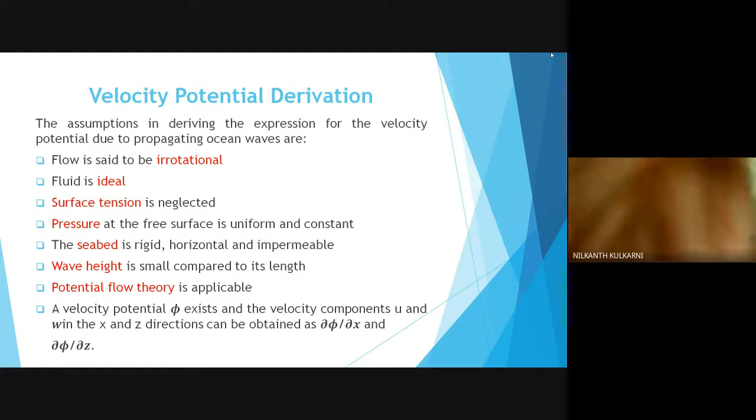Nitin, hello Nitin, you are from which place? I'm from Latur sir, I'm a student of SGGS in the past.

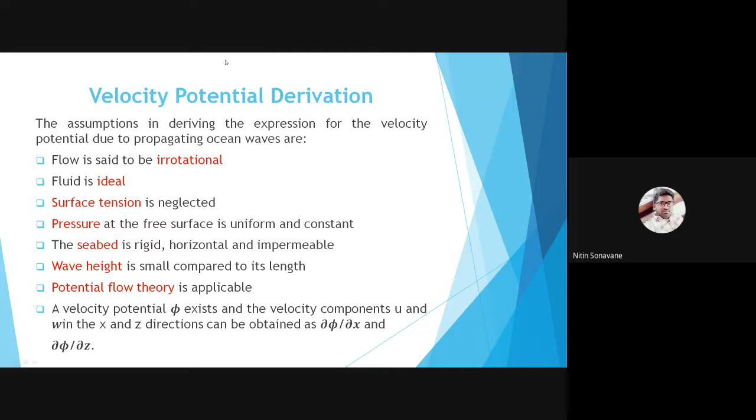Very good, very good. Now, anyone else who is a faculty member from state engineering colleges, can you interact? Friends, hello. Yes sir, Dawde sir. How are you Dawde? Fine sir. Okay, I have said fine, so you must be fine.

Now we are talking about, it's a highly mathematical fluid mechanics course in which we are studying wave mechanics. So for wave mechanics, as I have summarized, I will take you to this sketch very quickly, then you will understand.

Could you see this diagram of a wave? Yes sir. What are the 2 parts of this particular wave? We will go very slowly and very systematically. One is a crest. Just I am showing by a pen. So this part is a crest, the topmost part.

Is my pen visible on the sketch, Dawde? Yes sir, white pointer. So this is crest. So what is the value of theta at the crest, Dawde? Pi by 2. Pi by 2, 90 degree, okay?

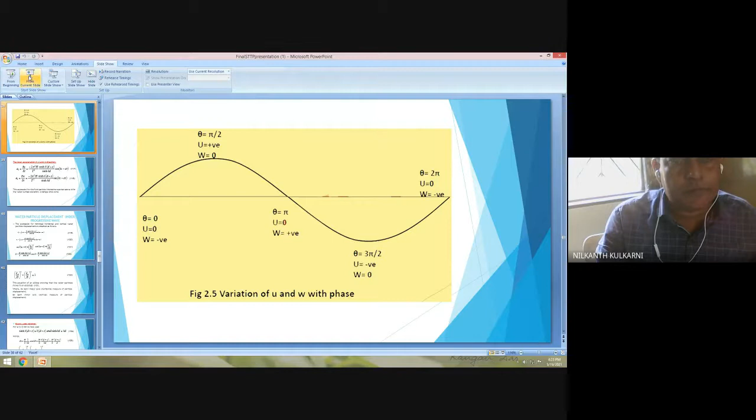Yes sir. So have you taken the definitions of K and sigma now? sigma is 2 pi by capital T, and K is 2 pi upon capital L, where capital T is wave period and capital L is wavelength.

What is wavelength in this case? Wavelength is this, from 0 to 2 pi, the total length of this x-axis. This is total wavelength, first we will give some time to understand this. Total wavelength is this much, 0 to 2 pi.

So what is the value of sigma? Is it greater than 1 or less than 1? Any participant? Hello? Is it greater than 1 or less than 1, Nitin? Hello? What is the value of sigma?

Write down, sigma is less than 1. It is a fraction. K is also less than 1, it is also a fraction.

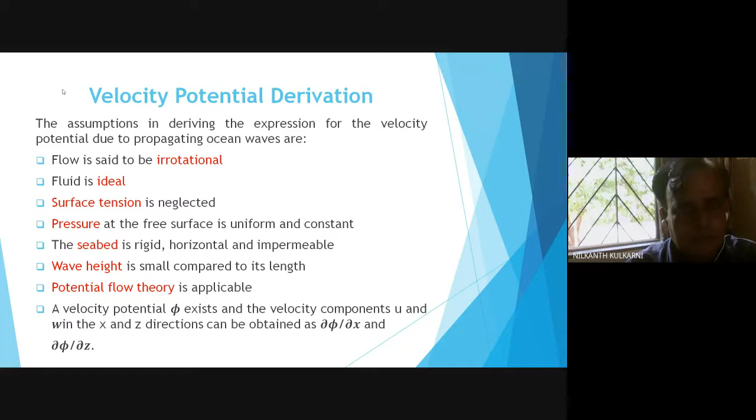Now we will go to that slide and explain the velocity potential derivation. Assumptions we have seen already, and after that the coupled continuity and Bernoulli's equation is also given in 43-44.

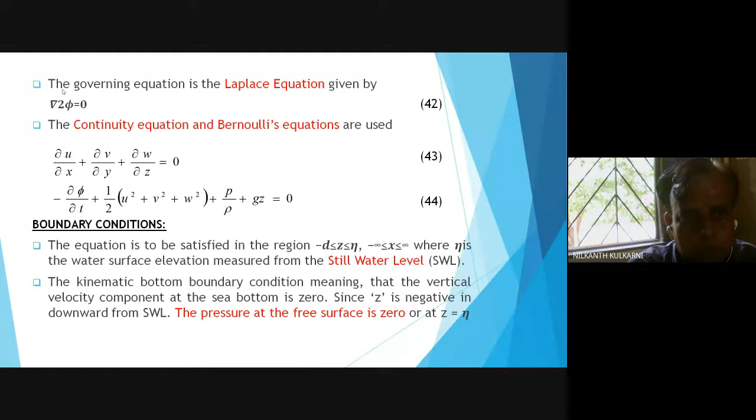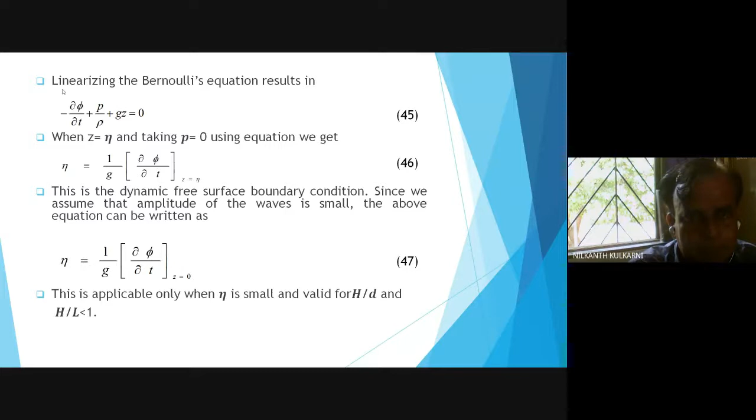To solve this coupled equation, we have applied two boundary conditions. First boundary condition is at Z equal to wave surface. The value of eta is given as 1 upon g into d phi upon dt, that is the value of eta, and we solve the equation.

Laplace equation by method of separable variables. I will not go into detail of this mathematical technique much, but you should understand the steps followed.

Independent variables are x, z and t. Then we find out the constants C, D and A, B. The constants are determined by applying the two boundary conditions.

First boundary condition: the gradient of velocity potential in the z direction is 0 at z equal to minus d.

Nitin, can you tell me the meaning of this equation 62? Hello, Nitin? Yes sir, equation 62, could you see it? What is that equation? Dou phi by dou z is equal to 0 at z is equal to minus d.

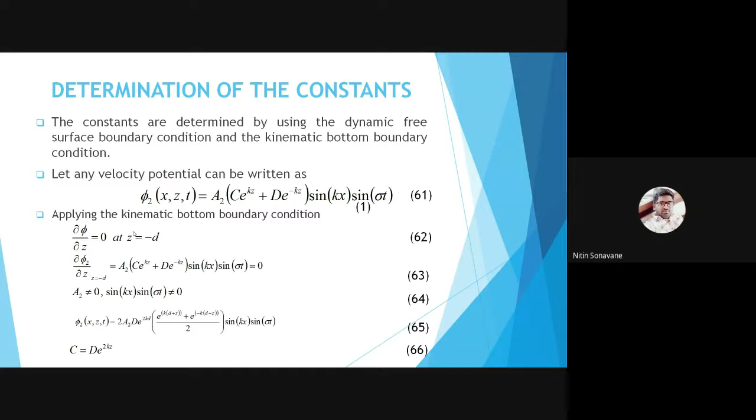What is the physical meaning of this equation? Can you briefly tell me? The velocity potential along z. What is minus d here?

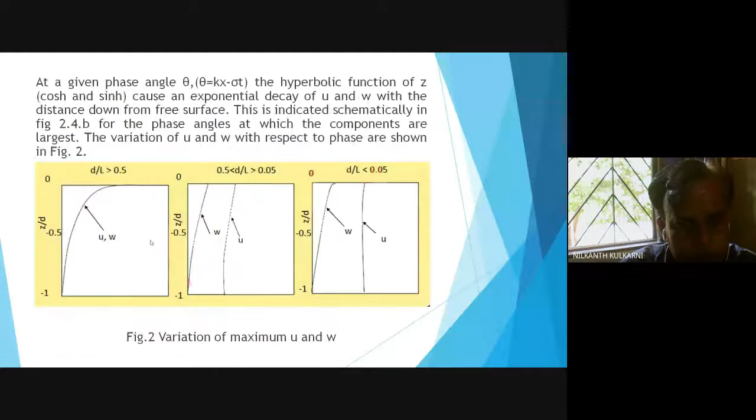Minus d means what? When you go to this particular sketch, I will show you minus d. So minus d means the depth, the z coordinate below the static water level, z minus 1 meter, z minus 2 meter, and so on. Could you see this sketch? This is a wave, below this wave is the depth of ocean water below the datum surface.

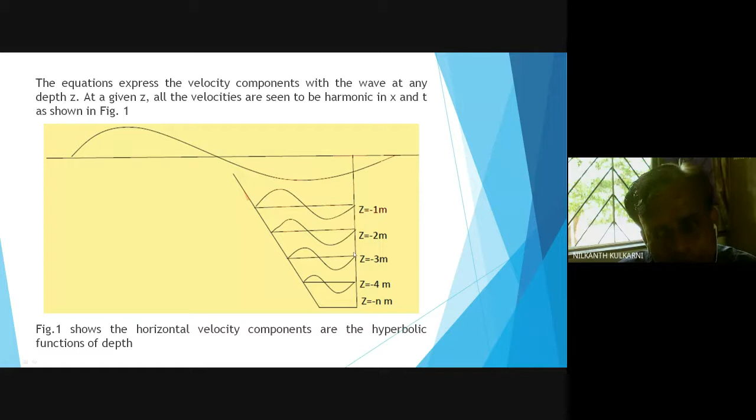What is the datum, Nitin? Z equal to 0, that is static water level, horizontal water level. Correct? Horizontal water level below which we are measuring the depth of ocean water, and that is minus d. Is it okay?

This study material will be made available to you, you can see it in detail also. We determine the constants A, B, C, D, and finally what is more important is this equation 78.

Could you see equation number 78? Yes sir. What is this equation? Let us focus on this equation, that was the stop point of our previous part of lecture.

What is the left hand side, phi? Nitin? E upon sigma? No, what is the meaning of phi, what is phi here? Velocity potential. Write down velocity potential. What is the unit of velocity potential?

Nitin, the unit is meter square per second. Unit of velocity is meters per second. Write down it: Phi is in meter square per second. So we will check the dimensional homogeneity of the equation.

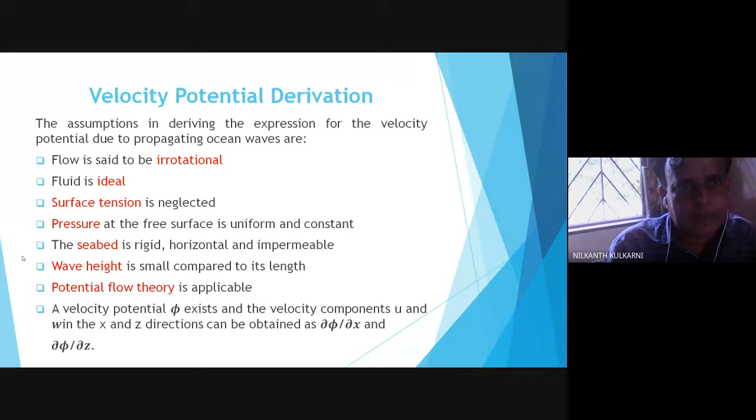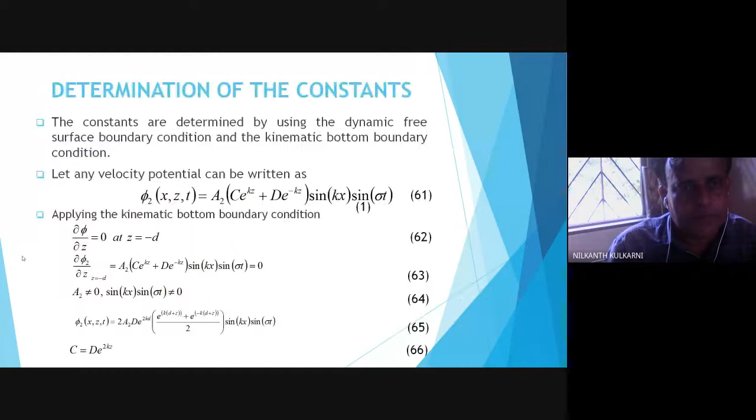So in this particular topic, I will summarize quickly what we have done in the velocity potential. We have considered 8 assumptions for applying the Laplace equation, and we have taken a coupled governing equation. Third step, we have applied the 2 boundary conditions, and finally the Laplace equation is solved for the velocity potential phi. Fourth step, we have obtained the value of phi as this equation. Fifth step, we have derived the equation for celerity. These are the 5 steps which are important for this topic, the derivation of velocity potential.

Now we shall start dispersion relationship. Dispersion relationship. What is dispersion relationship?

It is useful to get the relationship between the parameters, that is wavelength, wave period, and water depth. We are interested to find out the relationship between 3 parameters, that is L, capital T, and water depth.

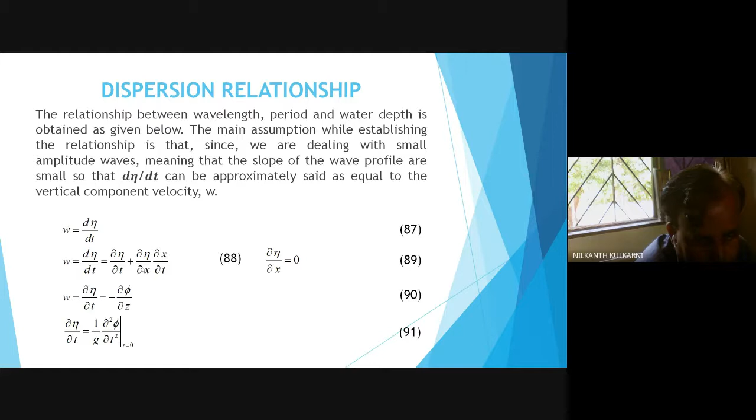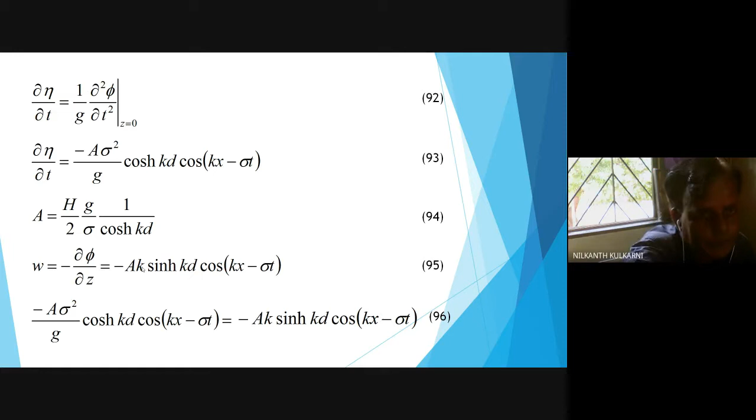Finally, for a horizontal surface, we can take d eta by dx equal to 0, and for small amplitude we can take d eta upon dx equal to 0. If we substitute it, this term becomes 0, and w is equal to dou eta upon dou t. We know already the vertical component of velocity in terms of velocity potential, that is differentiation of velocity potential with respect to z gives us the value of w. So we can write for w, and finally we use this boundary condition, that is dou eta by dou t is 1 upon g dou 2 phi upon dou t square at z equal to 0.

If we substitute it, and substitute the value of phi from the 78th equation, then finally we get a very important relationship: sigma square is equal to g into k into tan h kd. This is the famous dispersion relationship, sigma square equal to g into k, where g is gravitational acceleration, k is wave propagation constant, and hyperbolic tangent of kd.

What is kd? Kd can be written as 2 pi upon L into d, or 2 pi d by L. Underline this and write the value of kd here: hyperbolic tangent tan h kd, where kd is 2 pi d by L. This 2 pi d by L gives us the relationship between depth of water and wavelength.

So our interest is in the dispersion relationship. We are trying to establish the mathematical relationship between d, L and t, so that dispersion is more if the water depth is high. If we go to higher water depth, dispersion is more. So this is the important equation: sigma square equal to gk tan h kd.

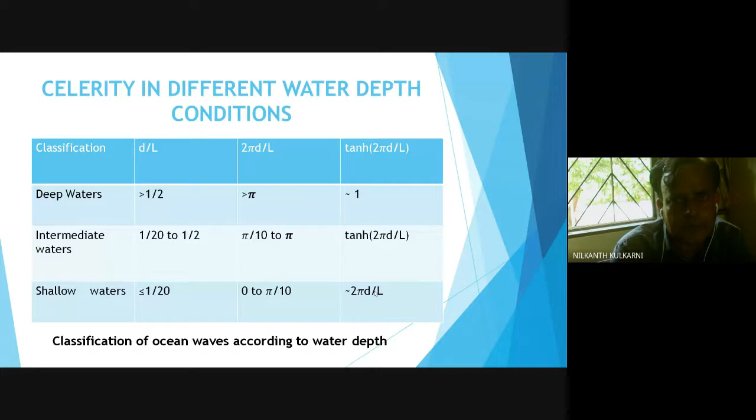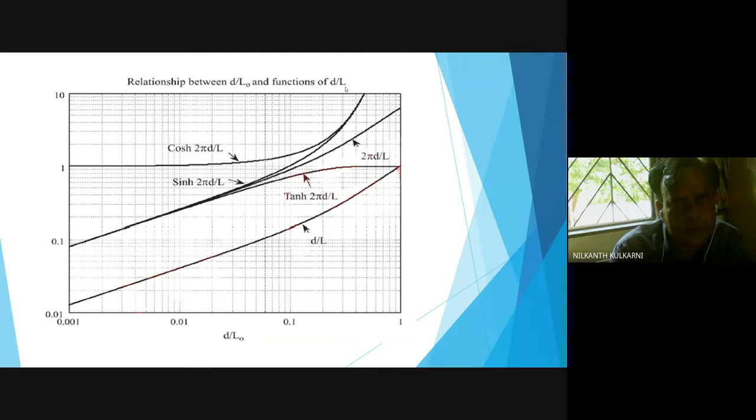So if we know this tan H KD parameter, you can just substitute the tan H KD value and you will get the value of C from these equations. This graph indicates the relationship between D by L naught to D by L. This is not very important. This is a curve obtained from experimental study.

Now we have completed the sixth subtopic, that is dispersion in the wave. So, the physical significance of dispersion - can any participant tell me what is the motivation of studying the dispersion of wave?

Yes, please. Hello. Hello. Yes, Nitin. Hello. Can you hear me, Nitin? Hello, Nitin. Hello. Yes, sir. Yes, sir. What is the use?

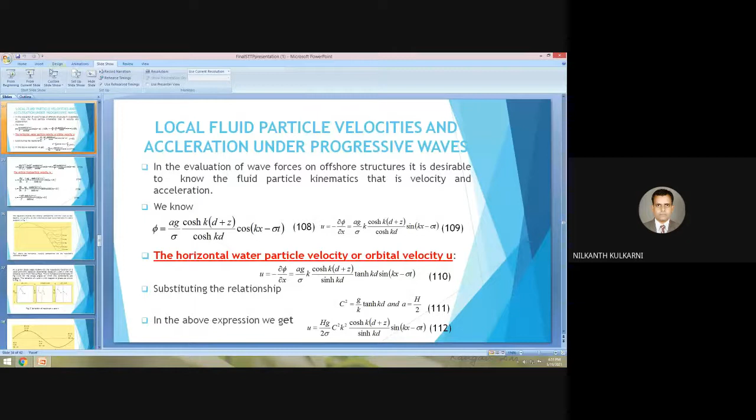Yes, sir. What is the significance of dispersion equations?

Yes, Nitin? Proper dispersion of waves in the medium. Yeah, so by which we are trying to develop the relationship between celerity and water depth.

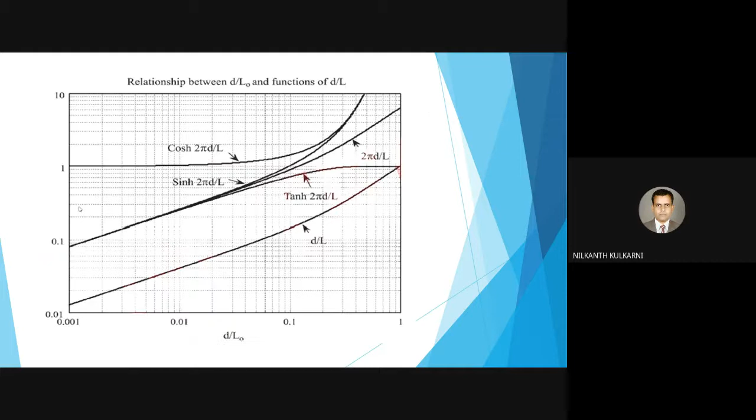Celerity and water depth. For deep water depth, the conditions have been given in the table. So remember this thing. A deep water is that water where the ratio of 2 pi d by L is greater than pi, or simply the ratio of d by L is greater than 0.5.

And we call a shallow water - where does the shallow water occur, Nitin? For the ocean, shallow water occurs at the seashore, and within the main body of ocean we get the deep water. Is it clear, friends? Hello.

Am I audible? Hello, Nitin. Hello. Am I audible? Yes, sir. Yes, sir. You are audible. So what is the difference between shallow water and deep water?

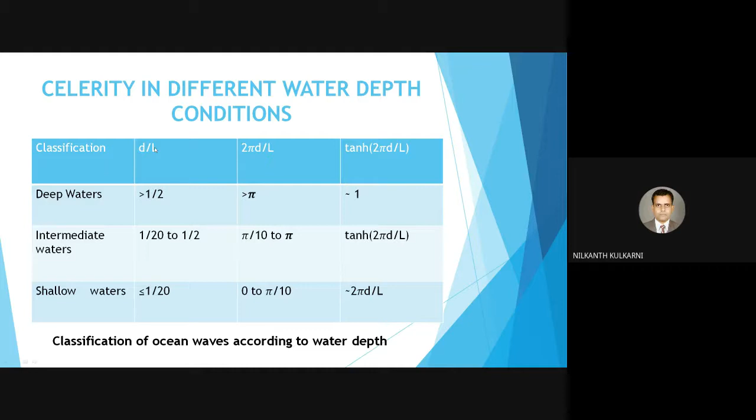What is the difference between shallow water and deep water? We say that a wave is traveling in deep water if the ratio d by L is greater than 0.5. It is traveling in shallow water if the ratio of d by L is less than 0.05. This ratio is the ratio of depth of water to the wavelength. I hope this dispersion is clear to you.

Now we will move on to another important topic, that is, we want to calculate the kinematics of a wave particle. In understanding the kinematics of a wave particle, we have to find out two parameters: one is velocity of a wave particle, and second, acceleration of a wave particle.

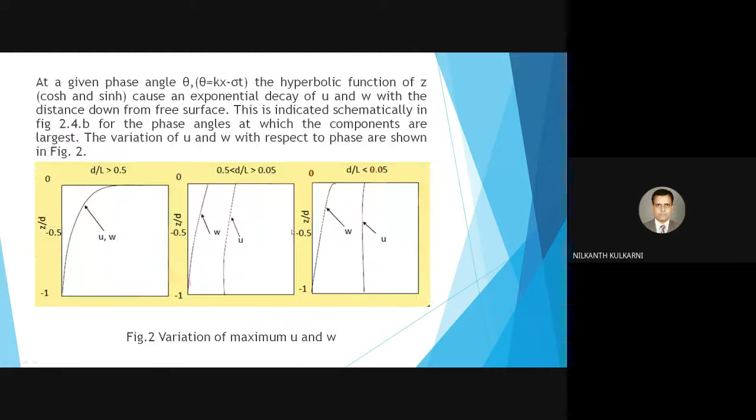Waves are damped at larger depths. Damped means u and w values are affected by depth, and the horizontal and vertical velocity components u and w are shown in this figure.

Now how u varies with phase. If phase theta is 0, u is 0 and w is negative. If theta is pi by 2, u is positive and w is 0. For theta equal to pi, u is 0 and w is positive. Using the equations of u and w, we can determine their sign. At theta 3 by 2 pi, u is negative, w is 0, and finally at 2 pi, u is 0 and w is negative. This is important to note, the nature of u and w from 0 to 2 pi phase.

Once we know the velocity components u and w, we can determine the accelerations in x and z directions. To find the acceleration, we differentiate the expression of u with respect to t, giving ax as dou u by dou t, and az as dou w by dou t. This is the acceleration of a wave particle for a given value of x coordinate and depth z. The wave accelerates rapidly if the phase angle is more, and wave acceleration is also proportional to wave height, like the velocity.

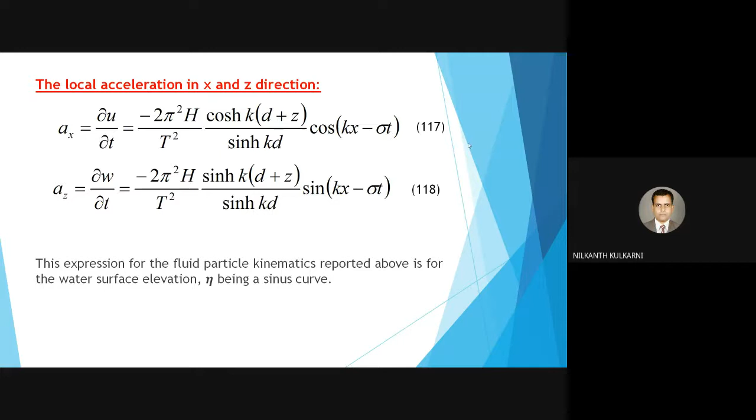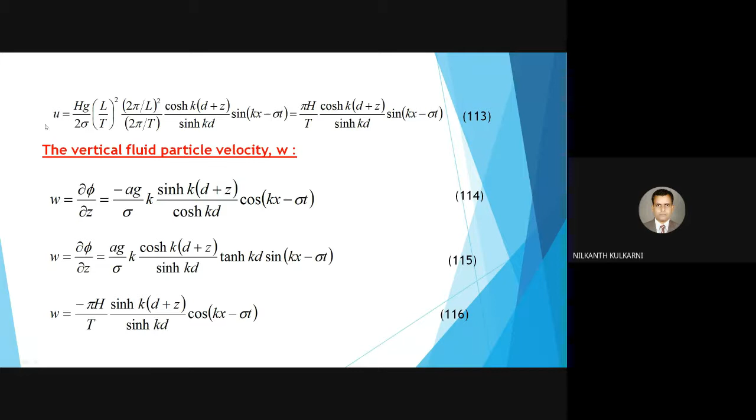These two equations represent the fluid particle kinematics above the water surface elevation, calculated on the sine curve. The four equations are for ax and az, acceleration, and the previous two more important equations for u and w, the u component and w component of velocity. We have derived the equations for u and w, and also for ax and az. The purpose of this topic is to know the values of velocity components u, w, ax and az, and how they are related to phase angle, water depth, amplitude of wave, and wave constants sigma and k. The derivation part can be seen in detail from the study material.

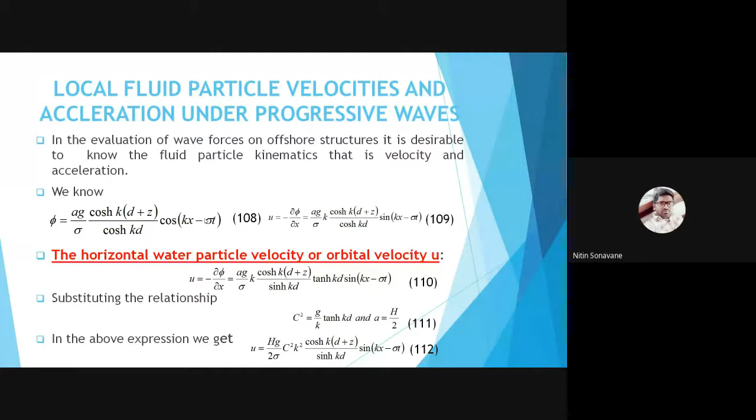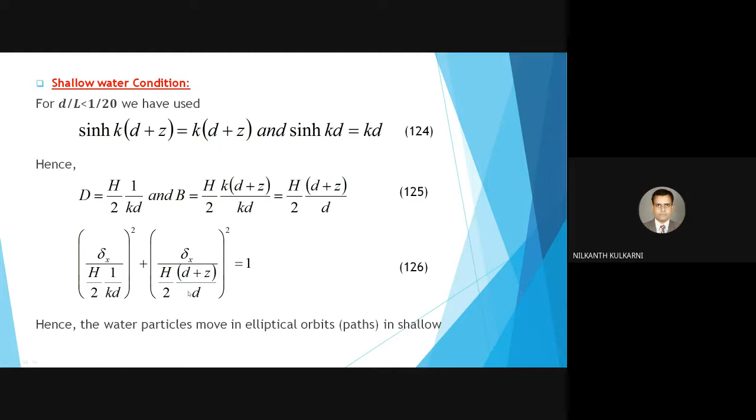So these two quantities are different in the denominator, so we say that in shallow water or at the seashore, the water particles orbit in an elliptical way, whereas for deep water, if we find out the value of D and B, the value is the same, h by 2 e to the power kz.

What is this? This is constant D, correct? Yes. And constant B is also the same.

So when the semi-major axis is equal to the semi-minor axis, what is the shape of the orbit? Nitin? Elliptical becomes circular because both the axes are the same. This h by 2 e to the power kz and h by 2 e to the power kz are similar. The size, major axis and minor axis, are same for a circle.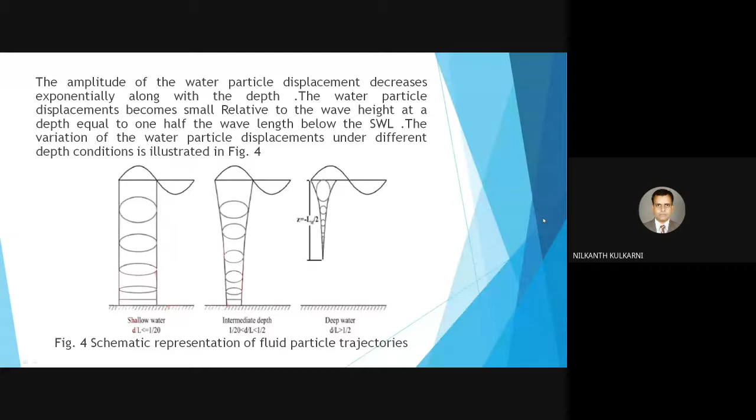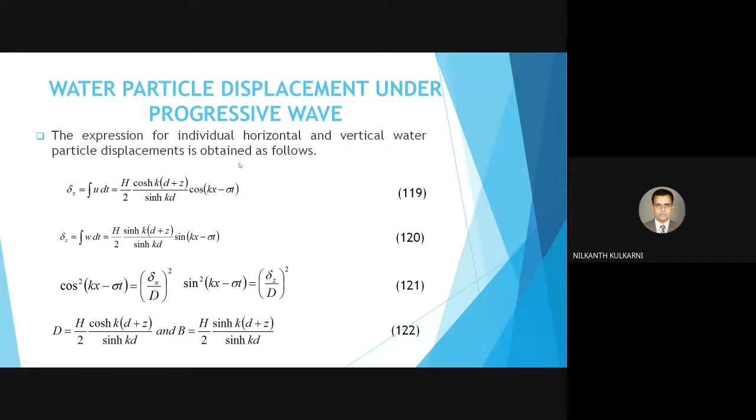In this topic, we will summarize this particle displacement. From these particular equations, we will come to know why the particle displaces. What is the reason for the displacement of a particle? What is the displacement of a particle?

It can be shown from this sketch. Say, for example, if a particle is here at this particular point, after some time this particle will move up, so there is a vertical displacement of the particle, and at the same time period the particle also travels some x distance. So at different time periods, displacement of the particle takes place in the x direction and also in the z direction. This water particle displacement is again a motion, mechanics of wave motion.

From the mechanics of wave motion, we can find out the velocity and acceleration, and also we can find out the displacement vector, that is delta x and delta z. From that displacement, we come to know the orbital shape: is it an elliptical shape orbit or a circular shape orbit?

So when you advance from the shore of the ocean to the deep water, you will find that waves generated at the seashore have elliptical orbit motion, and when you go deep into the water, you notice circular orbital motions in the water. Is it clear?

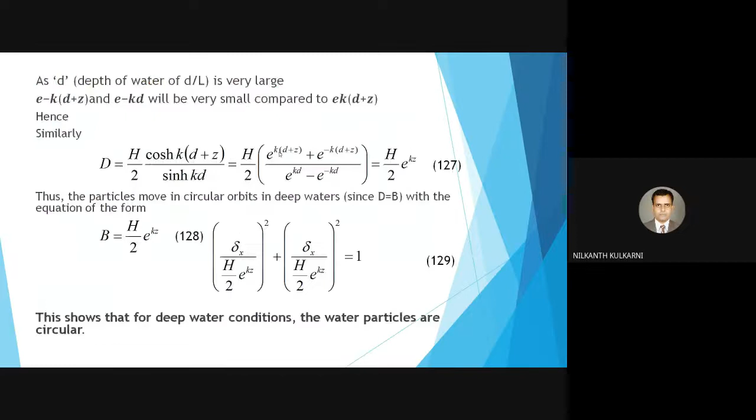Dear participant, anybody? Then only two topics are remaining, that is pressure distribution. Three topics are remaining in fact: pressure distribution under wave, then group celerity, and energy and power.

Before going for these three topics, let me ask you one question, Nitin. What did you understand from the displacement equations?

Very good. Yes, just come out with some answer. What do you understand by the displacement equation? Particle displacement equations, that is delta x and delta z, which show the nature of the wave.

That is the nature of the wave, elliptical or circular. Only two, and for intermediate waters we are not studying in detail, but for shallow water and the deep ocean body, the orbital motion is elliptical and circular. Is it clear? And we have also proved that by equations.

Is it correct? Okay, now let us move on to a very important topic, that is what is the pressure distribution under the waves, pressure distribution under the waves.

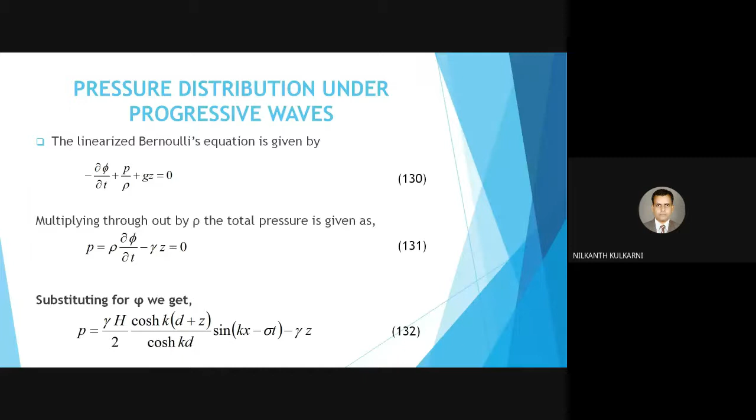Now we can manipulate this equation and we get gamma into wave height eta into the coefficient of pressure, or pressure response factor. The pressure response factor here is given as 1 upon cosh kd. Write down: Kp equals 1 upon cosh kd, and this pressure response factor at the seabed...

If we substitute the values of d and eta, we get this pressure distribution. So we are more interested in the pressure distribution, which is a triangular pressure distribution. Pressure is 0 at the water surface where there is atmospheric pressure. Then at the base it is d minus eta upon cosh kd, and here it is d minus eta. So under the trough, what is the value of 1 upon cosh kd?

Nitin, hello, for the seabed or under the trough, what is the value of 1 upon cosh kd? Can you hear me, Nitin? Hello, yes sir. Here, what is d minus eta? The multiplying constant is 1. So what is the value of 1 upon cosh kd? Write down: 1 upon cosh kd is equal to Kp, the pressure response factor. It is equal to 1 at the seabed.

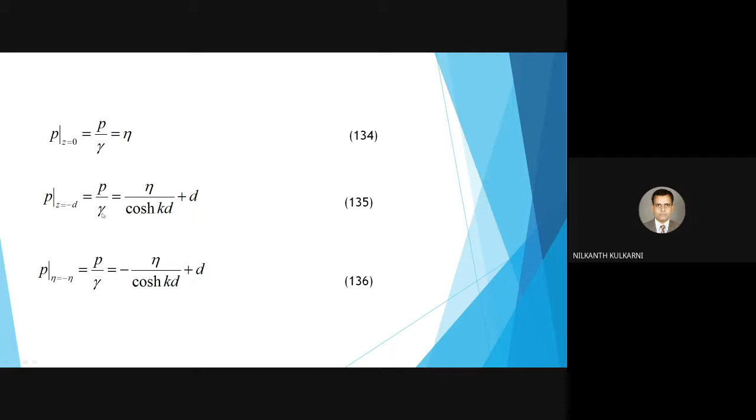So this is the pressure distribution, a triangular pressure distribution, as in fluid mechanics. We know as we go down and down, the pressure increases from 0 to d minus eta upon cosh kd, and for this wave this is d plus eta upon cosh kd, and this is d plus eta. So the pressure is gamma into d plus eta. What we have seen here, pressure head is equal to P by gamma, where gamma is the specific or unit weight of water, Newton per cubic meter.

So this is regarding the pressure distribution under a progressive wave. Pressure distribution. Is it clear?

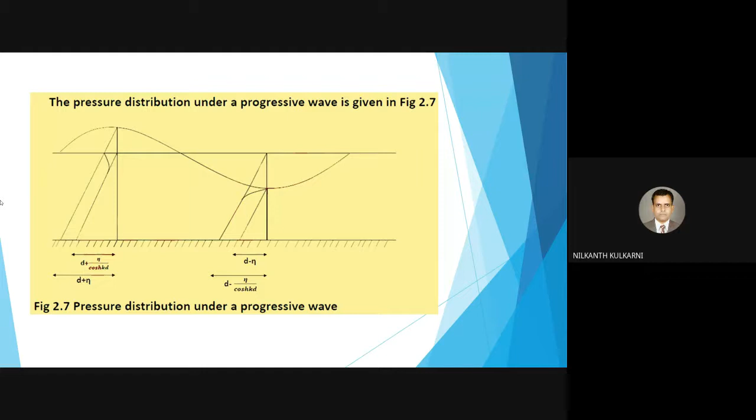Yes sir, yes sir. Now after pressure distribution we will go to a concept, a very important concept of group celerity.

What is group celerity basically? When a group of waves or a wave train travels, its speed is generally not identical, or not the same, to the speed of an individual wave. It means that if we travel alone, we can go with high speed, and if we travel in a group, our speed is less. It is the same analogy that the velocity or celerity of the wave, or the speed of the wave in a group, is less than the speed of an individual wave.

If any two wave trains of the same amplitude but slightly different wavelengths progress in the same direction, that is the x direction, the resultant surface disturbance is represented by the sum of the individual disturbances. So here it is wrong, it is eta 1 plus eta 2. Make the correction: eta total is equal to eta 1 plus eta 2, and the equation of the wave surface is always given as a sine function.

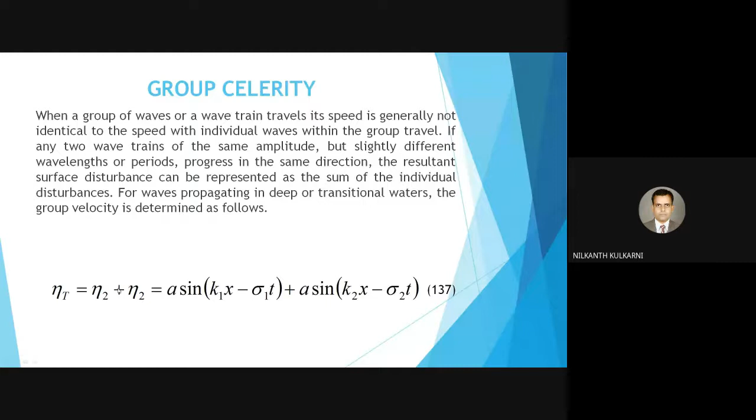Eta t is the sum of individual disturbances. Then how can we find eta t? So eta t means we take the nodes on the waves. So what are the nodes? Nodes are at different phases, 0, pi by 2, and so on. So if we solve the equations for eta t, we get the equation for the x node.

The x coordinate of a node for a group of waves traveling in a particular direction is 2m plus 1 pi times this particular ratio, equation 139, and the distance traveled we can find as L2 L1 upon L2 minus L1. So the positions of the nodes at time t0 are pi, 3 pi, 5 pi, 7 pi divided by these constants, for m equal to 0, 1, 2, 3.

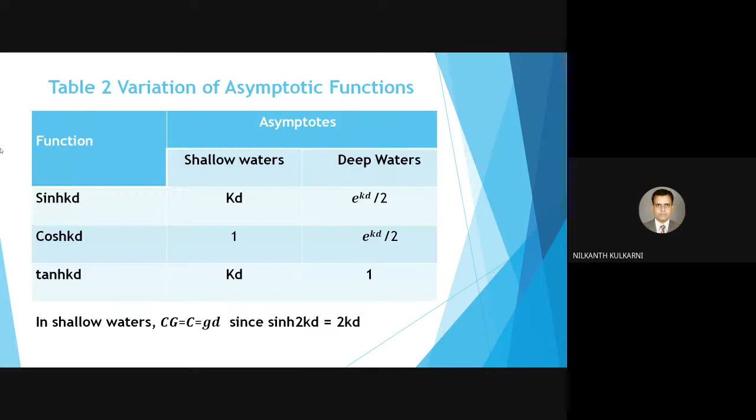CG, group celerity for deep water, is half of C naught, and CG equals the square root of G times D. This square root of GD is known to you in open channel flow also. This is the wave celerity expression we use in Froude number also. If the Froude number is 1, we say that the speed of the wave is equal to the speed of water.

Hello Nitin. Hello. Nitin, can you hear me? Sir, your voice is coming through.

You are audible. Then can you tell me the difference between CG of deep water and CG of shallow water, group celerity?

Yes. Yes, friends. Hello. Yes, friends. Anybody? Any participant?

Remember that CG is a function of C naught, so only of L. And this is C equals square root of GD.

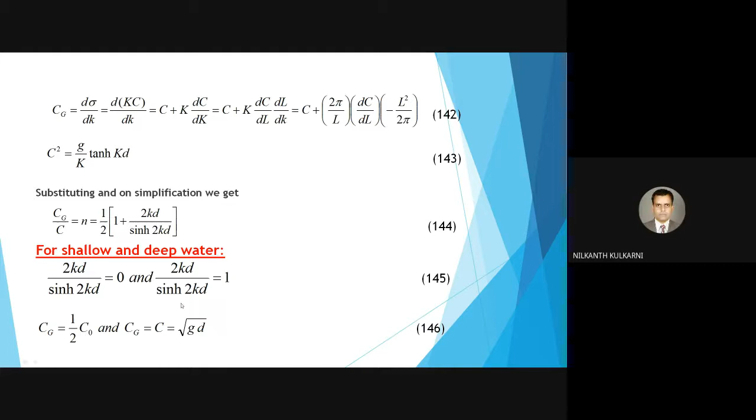Now the last topic is a very important topic, which I will cover within 10 to 15 minutes. That is energy of wave and power of wave. This is the last topic.

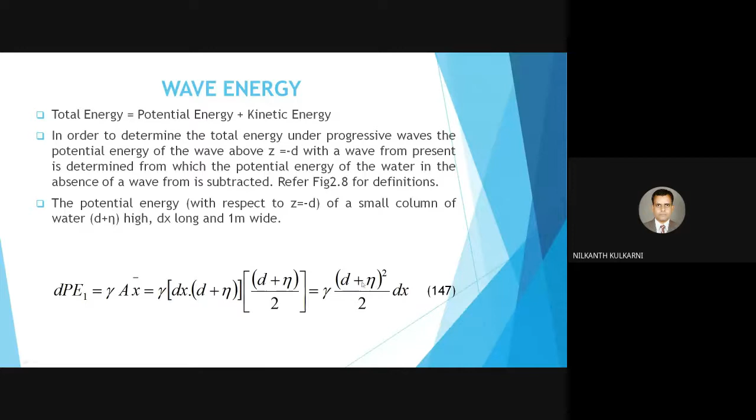Then we take the average of potential energy per unit surface area. So gamma remains same, this gamma by 2 as it is, and we integrate this d plus eta whole square into dx. While integrating, we integrate over entire wavelength L, and over entire wave period T, therefore we get the average mean value of potential energy.

If you solve it, you get the final result as potential energy directly proportional to amplitude of wave. If the wave amplitude is large, then it changes with the square. If wave amplitude is 2 meter, for example, then the potential energy is equal to gamma into 2 square by 4. If the wave amplitude becomes 4, so it is 4 into 4, 16 times.

So it is a square, and potential energy is also directly proportional to depth of water. So potential energy 1, due to depth and due to wave, is a sum of gamma d square by 2 plus gamma a square by 4. If alone we take, if we neglect the wave and take only the water body, then potential energy of water of height d, everybody knows it is gamma d square by 2 in fluid mechanics.